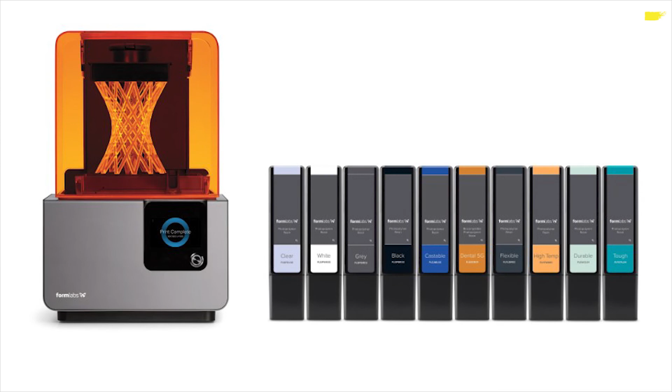So this is our main product, the Form 2 3D printer. How many of you have operated a 3D printer before? Okay, so like a third or so. This works a bit differently from the more familiar 3D printers like the MakerBot. This is what's called stereolithography. So you take a liquid plastic resin and you cure it with a laser.

You've probably seen adhesives like this if you go to the dentist and you get a coating put on your teeth. The dentist puts on orange goggles and shines a light in your mouth. This is the same idea, except you're using an ultraviolet laser that's controlled by a computer, and you're going layer by layer, and you're curing these materials.

So let's take a look at what's changing. One of the first things that's changed in the last few years is the variety of applications that you can approach with 3D printing now. And this really comes out of a lot of both careful technical advancement and careful thought about how 3D printing can solve specific problems within different industries. Formlabs now has 17 different materials.

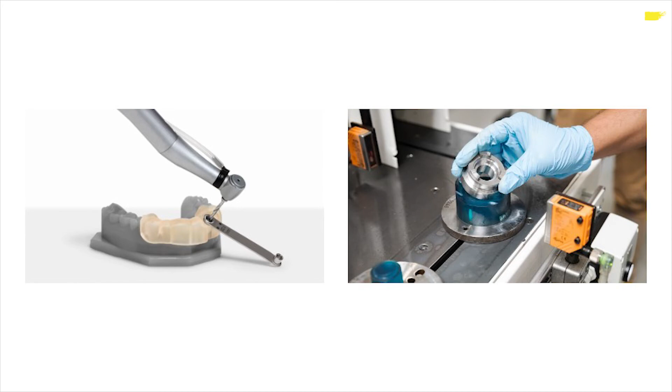Some of them are pretty finely sliced, but the upshot is that 3D printing can now be valuable and really accessible for applications all the way from digital dentistry like this. These are 3D printed surgical guides and models that are widely used in dental practices today, all the way to heavy industry.

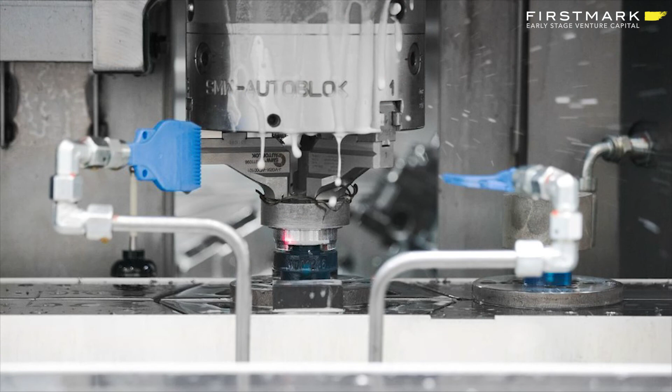This is an automotive factory where, thinking back to Etienne's presentation a moment ago, you're using a 3D printed jig to handle specialized transmission parts on an automated line. So this is an aluminum base, and then this is a 3D printed jig on top of it. So you're able to advance the cycles in manufacturing much faster and be much more flexible in how you approach stuff. So let's dive into a few of these advances that have happened in the last few years.

One of them is that the materials themselves, as I mentioned, have become much more capable as direct use materials. So this is tough resin, and it can not only withstand some of the wear and tear of a factory, of robots putting parts into it, of getting passed into a CNC lathe. It can also withstand even the chemical conditions inside these machines, which are just exploding with coolant all the time and getting exposed to a lot of not great stuff on the factory floor.

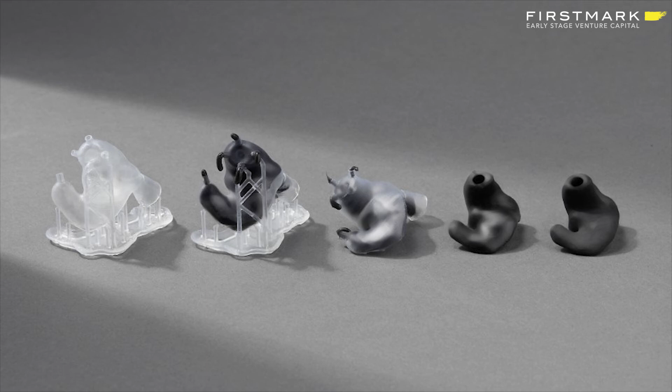But perhaps even more critical was this realization that 3D printing isn't always going to be about direct printing an end-use product. That there are a lot of products that will always have to be made with a variety of manufacturing processes, a variety of fabrication techniques, and that 3D printing can fit in and make these often quite difficult manufacturing processes much easier and add a lot of value.

So this is a process that we developed for creating custom earbuds. You start with a scan of your ear. There are 3D scanners that go inside your mouth and inside your ears now. It takes a few seconds. You've got a 3D scan of the topology of your ear canal. You import it into software. You design a custom earbud.

But then instead of 3D printing the earbud, which is tricky because not a lot of 3D printing materials are biocompatible and it's a little expensive, what you do instead is you 3D print a mold, like what you see on the left, out of a standard 3D printing material, and you cast silicone into it, medical grade silicone, and then you break the mold off, you add a medical grade lacquer, and you finish the product like that. The whole thing costs like $3, and it's faster and easier, and you get to work with silicone, which is a completely dependable material that you're used to already.

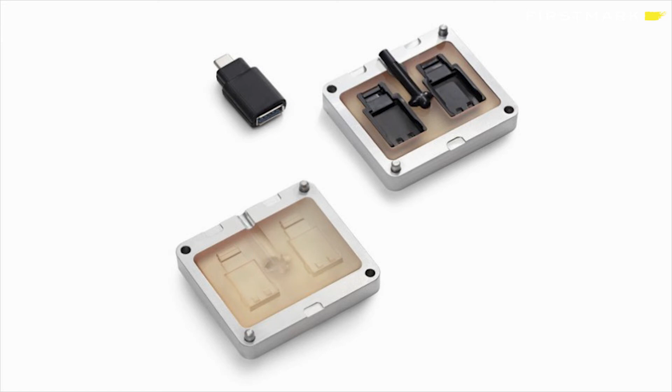Injection molding, of course, is the way that almost all of the plastic objects that you encounter on a regular basis are formed. You take a mold and you shoot hot plastic into it, and then you open the mold and the plastic comes out. And injection molding has kind of the opposite economics of 3D printing. With injection molding, it's extremely costly to create the mold, to create the tool. It can cost anywhere from $5,000 to $500,000 to cut an injection molding tool. But then everything that pops out of the mold is extremely cheap, fractions of cents. 3D printing works the other way. There's no upfront fixed cost, but then on the margin, the parts are a lot more expensive than injection molding.

Now you can blend these, and you can actually 3D print injection molds. They don't perform just like steel molds, but they're this remarkable bridge that makes it possible to do a lot of new things at new scales that weren't feasible if you're just cutting injection molds out of hard steel. So this is a high temperature resin, a high temperature 3D printing material that can withstand temperatures up to 289 degrees Celsius, which is ample for doing low pressure, short run injection molding.

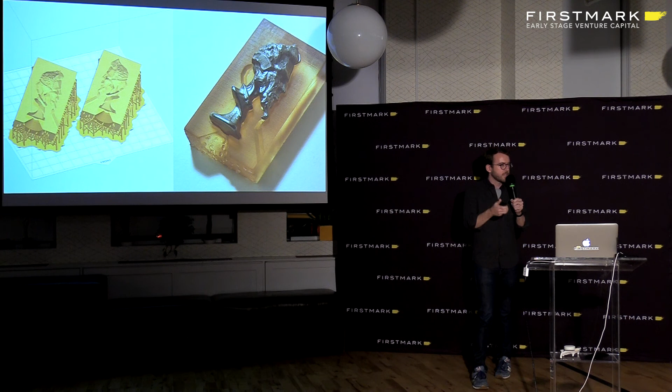And in fact, you can even be more dramatic about it, and you can cast soft metals like pewter into a 3D printed mold. And you can do really cool things like this, where you design a shape which would be difficult to fabricate otherwise, difficult to work out by hand, difficult to machine in steel in order to make a mold. You can 3D print it instead and get this geometric freedom, and then pour metal into the mold, into the 3D printed plastic. So this is a kind of capability that you just didn't see in any kind of accessible 3D printer until a couple of years ago.

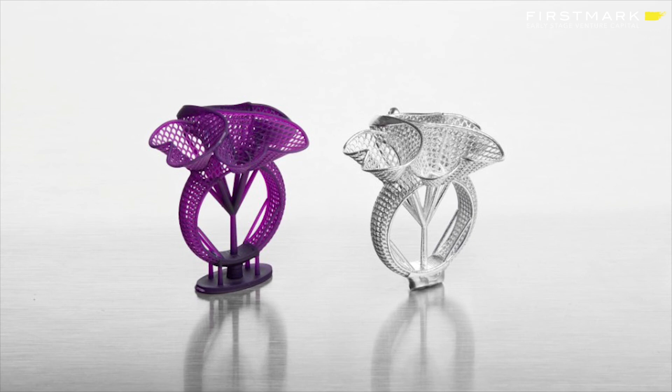This is another one that's really critical for a lot of industries, but especially for jewelry, and I have some cool pieces up here that you can all touch after the presentation. This is an illustration of investment casting, which is how a lot of metal parts are made, especially really fine small metal parts. Basically, you take a form, which is what you see on the left in purple, and you immerse it in a ceramic slurry, and then put the whole thing in an oven and fire it on a particular curve. You fuse the ceramic slurry into a solid, and you melt the form out of it, and now you have a cavity that you can pour liquid metal into and create an interesting shape.

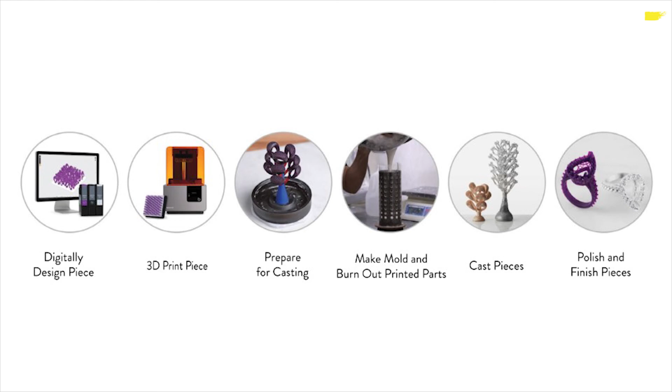So in this case, here's an illustration of that. You take the 3D printed form and you immerse it in the ceramic, you fire it in an oven, and then you can finish the piece. What you wind up being able to do is create entirely new kinds of products, shapes that you wouldn't have been able to produce by hand or by, again, machining or molding

in other ways. What you wind up with as well is an end product that was made with 3D printing, but which has no 3D printed material in it whatsoever. So this is a piece of jewelry, which would be familiar to anyone who's bought jewelry that's made any other way. We even have new materials like 3D printed ceramic, which is what this is, and I have a few pieces again that you can touch after the presentation.

Nothing is as mind-blowing to hold in your hand as 3D printed ceramic, especially a 3D printed ceramic lattice, because you're just not used to the idea that ceramic can be made in shapes like this. You wouldn't be able to machine or mold a really fine lattice like this. This is a material that's a ceramic powder suspended in a liquid plastic matrix.

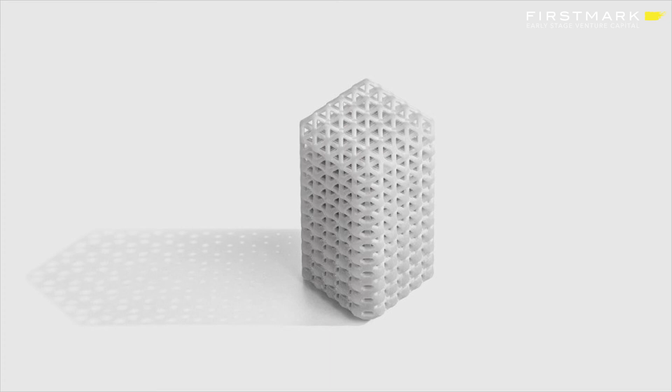So the capabilities of 3D printed ceramic go, again, way beyond what you've ever seen before in 3D printing. It's gorgeous. These are designs by a really cool design firm in Cambridge called Nervous System. And it's also highly practical. You can do stuff with these 3D printed parts industrially and artistically that you couldn't do with 3D printing before.

You can even use this. This is a gas nozzle that you can use at extremely high temperatures because it's just ceramic, and you're able to enjoy this geometric freedom to design the part in the way that you want without the limits of conventional manufacturing. The next huge advancement that you're going to see is the arrival of selective laser sintering in the accessible 3D printing world.

These machines usually cost north of $100,000, but this is our second main 3D printer that's shipping next year, called the Fuse 1, and it's $10,000. So there's this enormous price pressure downward and an emphasis on ease of use that makes it possible for a lot of different people from different backgrounds to use these processes.

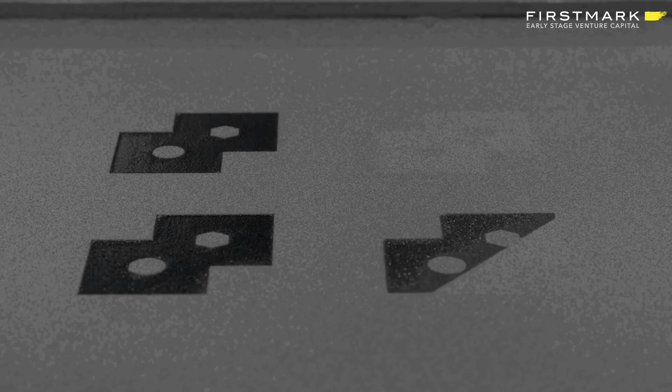In selective laser sintering, what you have is a bed that you spread a thin layer of powder over. In this case, this is nylon plastic. It's a great engineering plastic, PA12. And so you spread a very thin layer of this nylon powder over the bed, and then you use a laser to sinter, to fuse the nylon together in a particular shape. That's one layer of your part. You spread more powder on top of it, and you fuse that layer as well with the laser.

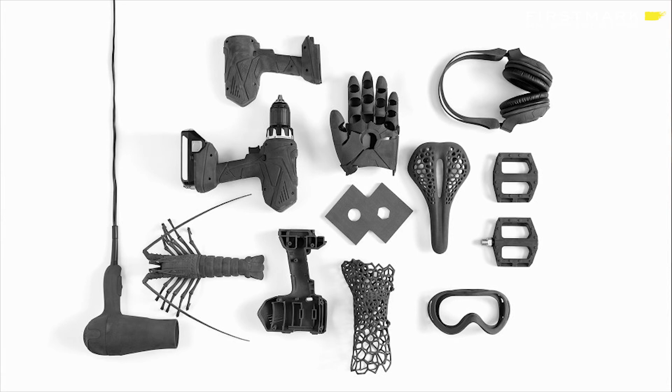You can make all sorts of things with selective laser sintering. One of the drawbacks of other types of 3D printing processes is that they tend to be fragile, but these are very strong parts, and you get complete geometric freedom because the unfused powder supports the part that you're fusing in the printer. So there's no limitation as far as support structures or difficult geometries that you have to consider as you're designing.

You can even design things that move, mechanical assemblies that work straight off the printer. I'll show you one of those in a second. You can pack these parts extremely efficiently, and that makes a really big difference for manufacturers as well.

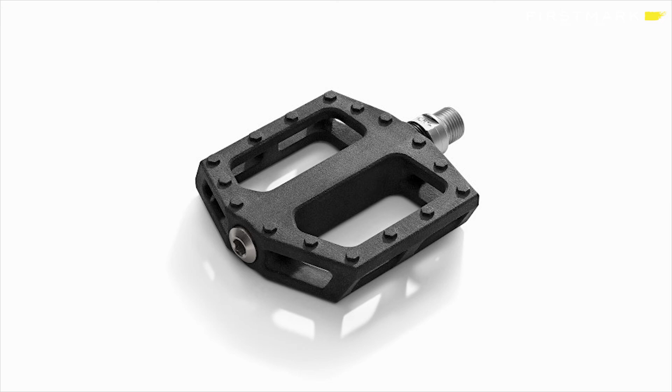So consider this bike pedal, which is a real working bike pedal that a colleague of mine rode to work for 6 months. And you can print a lot of them at once in the build chamber because, again, all of these parts are supported by the unfused powder around them. So this really transforms the capabilities of manufacturing, of additive manufacturing, of 3D printing commercially.

This is possibly the coolest thing that's come out of this printer so far. This is, again, a design from Nervous System, the firm I mentioned in Cambridge. And it's a dress made of 3D printed chainmail.

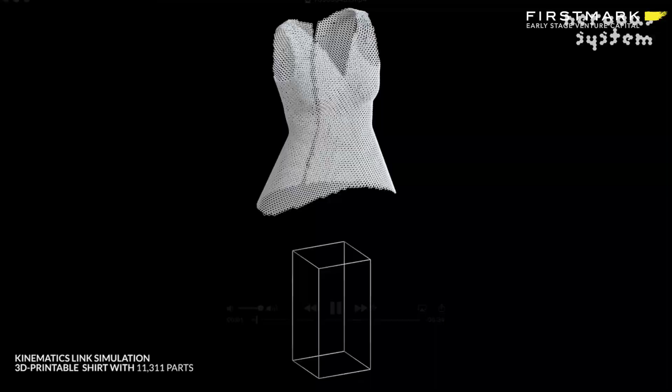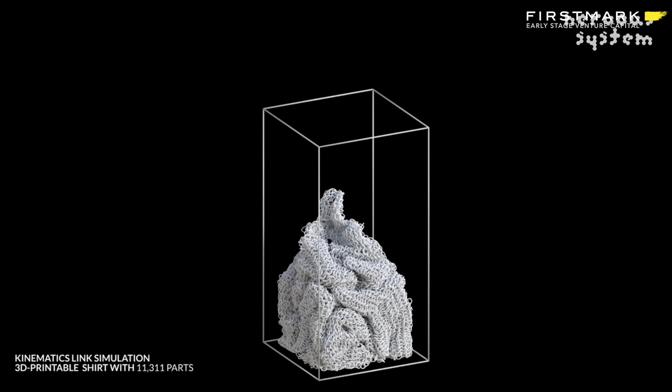So this is nylon plastic. It's made of 11,000 separate links, each of which moves separately from the others. And it's much larger than the build volume of the printer, and so it was printed like this. There was a physics simulation that took this nylon, this chainmail dress with separate links, and you imagine it dropping into the build chamber like this, and then you print it in the 3D printer in that shape.

So it comes out like wadded up, and you pull it out of the printer, and you kind of flick it off, and all of a sudden there's like this dress that you're holding. This is really magic, and this gets to the freedom and the flexibility of 3D printing. It's not just the ability to do mass customization or whatever. It's also just this incredible freedom to design the stuff that you want to design. So you're going to see products changing because there are now these really capable 3D printing processes and materials that you can use to create the things you want to create.

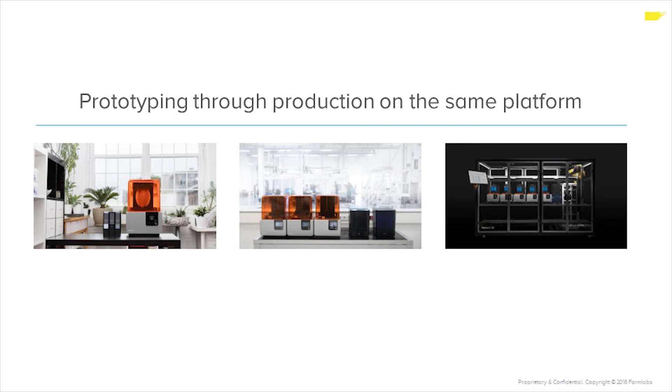So to go back to these 3 companies that I mentioned that are the 3D printing unicorns at the moment, Formlabs is a bit different from the other 2. Carbon and Desktop Metal are both exerting some downward price pressure on the industry, which is good, but Formlabs is focused entirely on producing 3D printers that are not only inexpensive, but also really easy for the end user to use. And this is important because the same printer can then become the universal 3D printing platform for every step of the product development lifecycle, from an individual engineer or designer with a single 3D printer to a small run prototyping operation to a full manufacturing operation.

This is the Form cell. It's an automation cell that contains between 5 and 10 Form 2 3D printers, and there's an arm that comes and changes out the build platforms and does a little bit of post-processing on them.

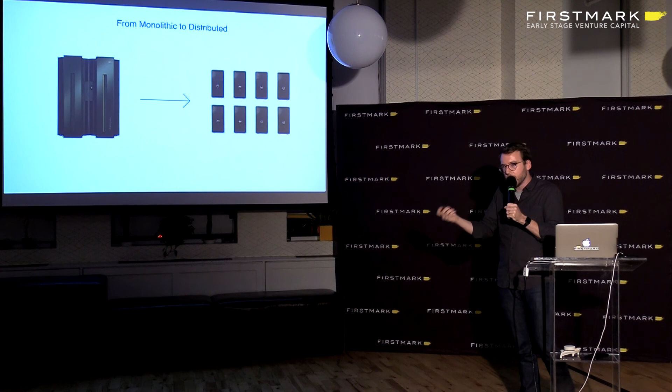And so our idea is that just as in the 1960s and 70s, computing was monolithic, you had these giant mainframes, but then it became clear that there were advantages to distributing computing and giving everyone access to computing in all sorts of different places. We see an opportunity to do the same thing with 3D printing. It's just as capable, but it's much more accessible. So this is an industrial 3D printer that costs like $300,000, and these are desktop 3D printers that cost $3,300, and that do almost as much as the printer on the left.

And you can buy a lot of these desktop printers for the cost of a single industrial machine. For one of these really beautiful industrial machines from Carbon, it costs about $160,000 to rent one for 3 years. And for that amount of money, you can buy 50 desktop 3D printers that really transform what you're doing, because not only can you produce on 50 printers in parallel and get tremendous output, but you can also put them all over your company and encourage people to innovate with them and really embed 3D printing in the things that they're designing and developing.

Actually, the whole thing was super interesting, but that last bit I didn't realize you can actually parallel process. There's a concept of distributed printing. Yeah, and it's incredibly powerful. There are a couple of layers of management that you can do. One is managing a bunch of different printers in parallel. Another is that in a lot of uses of 3D printing, you're using much less than the full build volume on each part.

For instance, if you're a dental lab and you're making mouth guards or aligners, you can fit 16 of these parts or something on a single build platform. So you can further parallelize it by manufacturing 16 different parts simultaneously in an individual printer. So there's a lot of room to automate that kind of management process.

In the 3D printing wars, how much of the competitive advantage is software as opposed to the actual printer? That's a good question. Some of the 3D printing companies are coming out with their own generative design software, which they see as a major advantage. We don't have that at the moment, but they're thinking that if you control the output and you know how the output of the process works, you can feed it into the algorithm that does generative design.